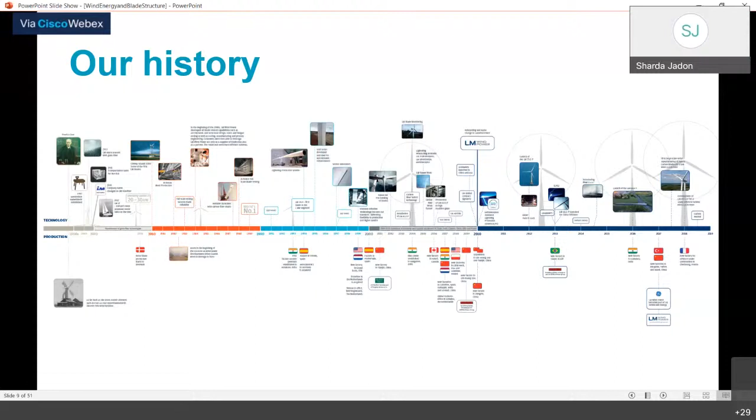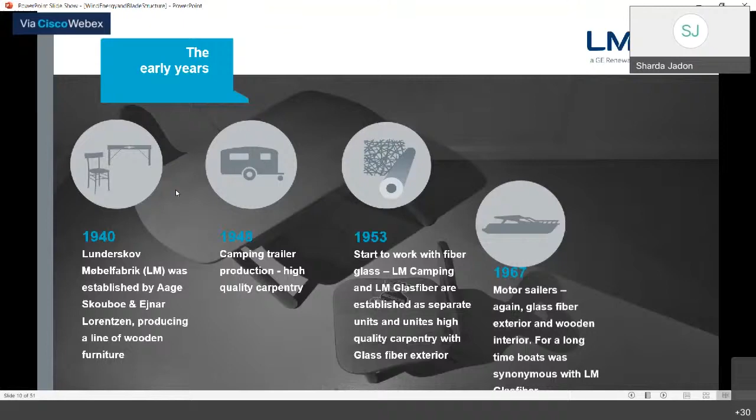Just a quick summary of how this started from furniture, wooden furniture, and they advanced in technologies, and now we are one of the best suppliers for wind. So this is about the business, this is about my organization. Now coming to what we are here to discuss.

So first of all, what is renewable energy actually? Everywhere we are seeing green energy, renewable energy. What exactly is renewable energy? But before that, another general question: where does this energy come from?

If I say energy comes from the sun, any kind of energy, you either have a light source or a heat source or both. As you know, light helps us get food for plants and then animals too. With heat and pressure, all those decomposed things convert into fossil fuels, which further gave us coal, oil, and natural gas.

There is another way to extract sun energy, which is what the sun is already giving us: wind and solar. As we know, solar is being used like anything nowadays, and wind is also accelerating. So coal, oil, and natural gas we call non-renewable, whereas solar, wind, and hydro are renewable because they will keep going. Non-renewable may get extinct after some time, but solar, wind, and hydro will keep going on. So we should think about something that will keep going and fulfill our energy requirements.

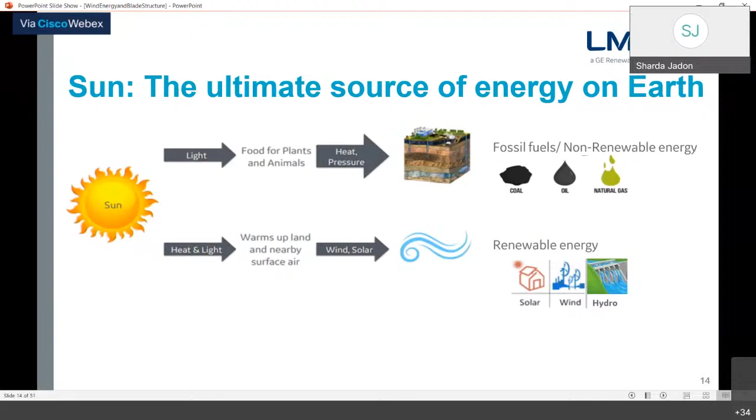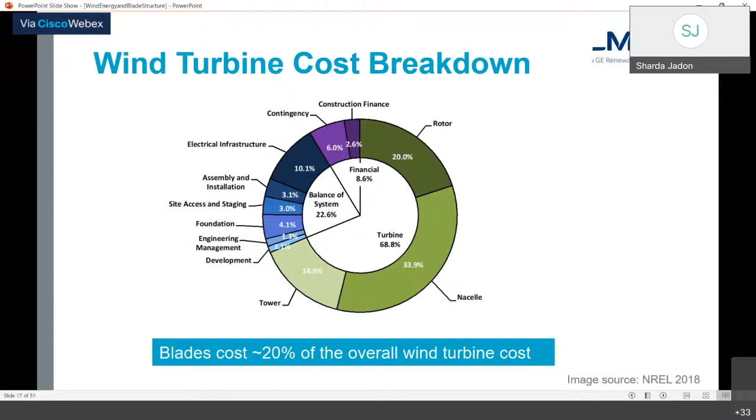It then increased in 2002, 2004, and 2012. And now in 2019 we have the Haliade-X, which is 12 megawatts. The rotor dimension is 220 meters, and the blade size is 107 meters.

Isn't it huge? I'll show you what this size compares to. You might have seen the Eiffel Tower — its dimension is around 324 meters. And the one we're discussing, Haliade-X 12 megawatt, is 260 meters. That's such a huge structure.

And how much carbon emission are we saving from this? It's around 52,000 metric tons of CO2, equivalent to the emissions generated by 11,000 vehicles in one year. That's something beautiful, because we are moving towards a better and greener world.

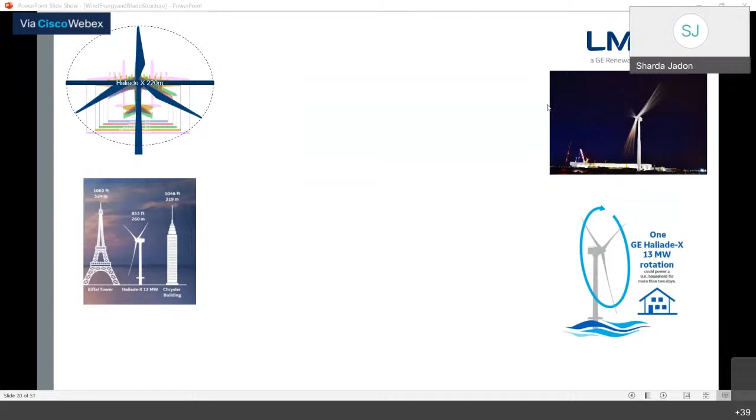Yes ma'am, thank you. So here, just to tell you about the blade design, what we consider in the blade design.

So the blade design is not solely aerodynamics, it is structural plus aerodynamics, a combination of both. Then it is also about noise and tip losses. You might have heard that people, not in India but in European countries, keep complaining that wind turbines are creating a headache for them, that it is noisy and all those things.

Yes, there are many advantages of wind turbines and there are a few disadvantages too, so we have to be very mindful when installing them. The best part about wind turbines is that the source of energy is wind, which is absolutely free, and it is clean energy. We are not burning anything, we are not creating any CO2. And another advantage is that it lasts long, up to 20 years, which gives an added advantage.

Now coming to the structural part. Noise we can control by designing a proper tip and managing losses. Especially the starting 20% or 30% of the blade depends solely on the structural point of view, then aerodynamics comes into the picture, and especially the tip part is driven solely by the aerodynamic structure.

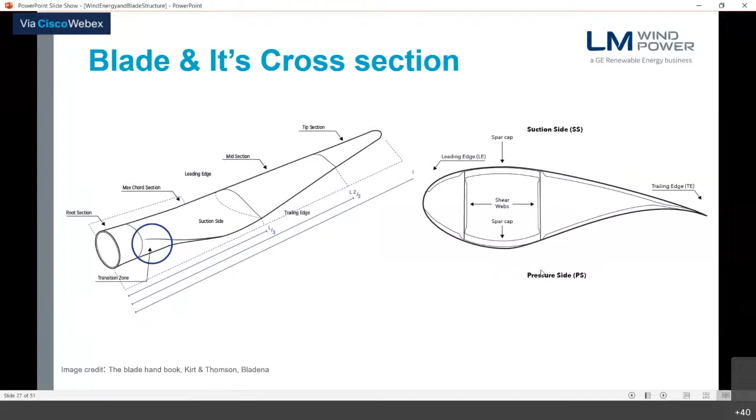Now coming to this is suction side and another is a pressure side. I'll show you more detail about it. So blades are designed, previously using metals also, but nowadays all wind turbines are using composite material. What the composite material is, I will tell you later, but first I'll tell you how the sections are there.

So we produce the blade into two major parts, which is the upwind side and downwind side, two sections, suction side or pressure side. And then we join these two using adhesive on both sides, leading side and trailing side. So you can see this leading edge and trailing edge, and here we have adhesive, adhesive here and here, and this is like the root area.

And this fiber we mix with the matrix and it becomes a composite material. The property of the composite material is way higher than steel or any other ferrous material. And the added advantage here is the weight is even 75% of the steel. So by using composite material, what we are doing is tailoring the blade depending upon the strength. Wherever we want strength, we use those kinds of fiber materials, either UD or bi-X, and this saves a lot of weight for us. As we know the blade should be lighter and lighter to generate more electricity, and this is possible only after using the composite structure.

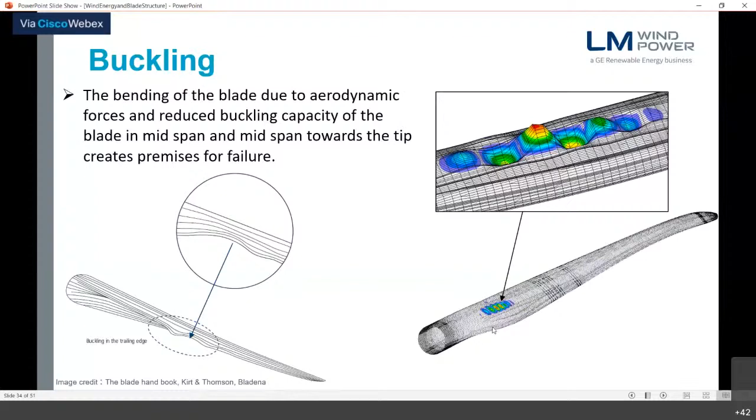One of the things is, you can see this is a leading edge. This is the blade, this is the leading edge, and this is the trailing edge part. As we know, we bond these two shells together using adhesive to join them, there may be a possibility that this adhesive can fail and this can generate a crack here.

And not only on the leading side and trailing side, but also the main laminate where we have the webs. So this can be a possible location of the crack and crack propagation.

Apart from that, there is something called buckling which can happen, because of aerodynamic loads which keep going in every direction, like compression, tension, which causes further strains that generate and deform, and it can lead to blade failure.

So apart from that, there are twists also which are coming, and which will cause shear distortion in the blade.

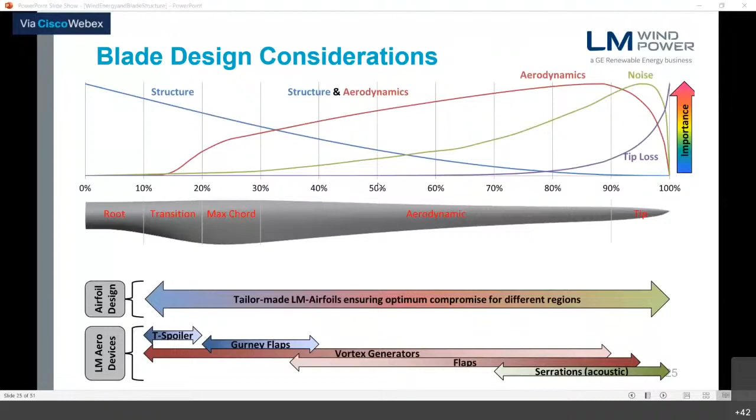So please ask questions if there's anything. And then coming to this, I have covered these failure modes here.

So the rotor size, as I mentioned, has a critical impact on annual energy production. Bigger the blades, better the annual energy production.

Again, modularity for flexibility, so we can use one turbine blade design across another turbine. And then there are add-ons or airfoil designs, more rigorous work where we add small structures which enhance the AEP, or boost the AEP through clever designs.

Then, about materials. We know traditional materials like metals won't help in this kind of design, because we want a lighter blade, a stronger blade, and something that lasts 20 years. So standard materials won't help; we want advanced materials like glass fiber. Currently in LM, we use a glass fiber polyester combination, where glass fiber is the fiber material and polyester is the matrix. Now we are coming up with more advanced things called carbon hybrids, and low styrene gel coats, which are important from the cost perspective and for lighter blades too.

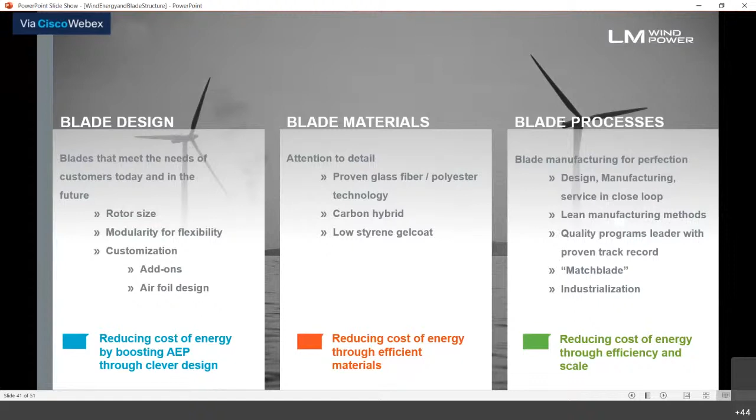We are the best in the market on this. We are quality program leaders with proven track records, which help us get it right the first time, every time. We have Matchblade and industrialization experience of almost 2.5 lakh blades till now, which is an added advantage compared to any other competitor in the market.

So, reducing cost of energy through efficiency and scaling. As I mentioned, we have very strong design drivers with us, many experienced people who know blades inside and out.

But even after that, if there is any single miss, it can be taken care of by our proven reliability, meaning our blade testing. We test our blades to the extreme to ensure reliability throughout their lifetime. We have test plants where we subject blades to fatigue and static testing, so we are ensured that our design is robust.

As we have proven records for these blades and technologies, once our blade is manufactured in the plants, it's important to ship it from one place to another, because we cannot handle the blade from any location—it should be handled only at a few fixed locations which we designed for. That's how our transportation systems come into picture.

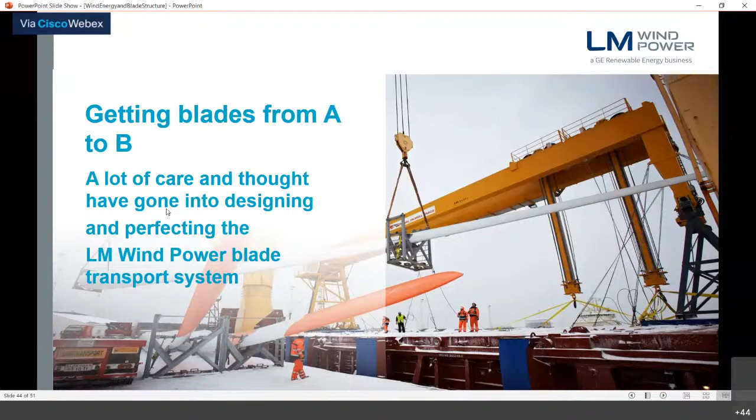It would be good if we make the session interactive, because these blades are used not only on land but also in oceans. When installing on land, different things come into the picture, and in oceans, it's a different situation. You may have a question like, what is the disadvantage of these? Because we are only seeing the advantages. Do you think it can have any disadvantage?

Like salt corrosion. In the blades and wherever we have fixed that, if there is more and more salt exposure, sodium chloride corrosion will be there. So, to prevent that, what kind of materials are coated on the blades?

So you're right. Based on the material we are using in the blades, and the gel coat and paint we are using, salt corrosion will not impact at all. So even if it is on land or water, we have special coatings which will prevent it, but especially on the blades, because we are not using any metals there. We are using composite materials.

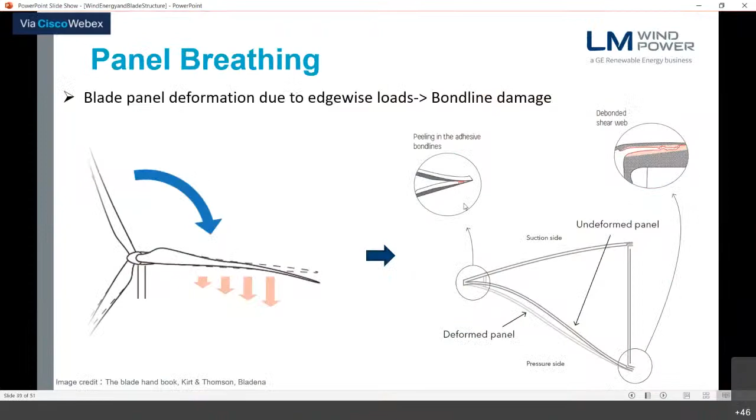So before that, could you also - Mr. Ganesh, correct? Yes ma'am. Beautiful question, like the Make in India thing, correct? I think you are thinking in that direction, if I'm not wrong. Yes ma'am, yes ma'am, perfect.

Just to show you, this is the highlight of where we are in India. So all the blade designs we make for India, we produce in India itself. We have plants in Baroda, Bangalore, and another plant in Pune - the two major production plants are in Bangalore and in Vadodara, Gujarat. These things are taken care of when we consider the Make in India initiative. So we design our blade and manufacture our blade within ourselves.

If you have the opportunity, please go and see the production plants where the blades, turbines, everything - even generators - are made in India. That's what I know - everything, towers, installations. Not only this, but even for the China market, India is producing blades. Even for the France market, India is producing blades.

Then again, transportation cost and other things come into the picture, which is why we have many locations based on cost and other factors. India has an advantage because our labor is not that costly, and production cost is also comparatively very low compared to other countries. That's the advantage India has, and not only one company, but many want to produce blades in India because of the low cost.

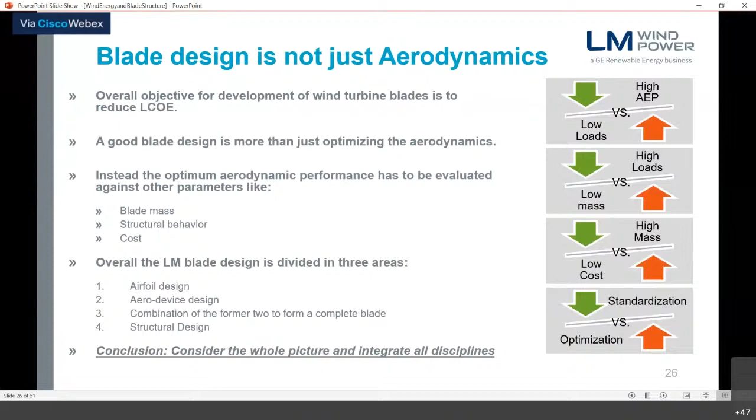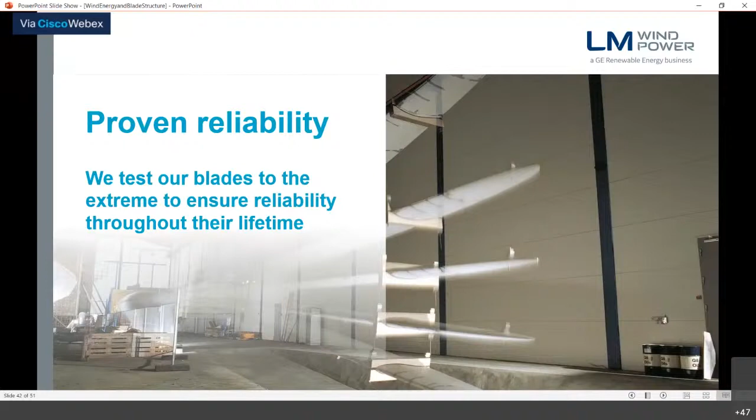As we are very much robust about our design, considering all the failure modes, which will give a life of 20 years, that is a win-win situation for us, for the wind, and for Mother Earth too.

Climate change mitigation - every year there's an increment in temperature of 1.5 to 2 degrees Celsius, this rise is there. If we can do something to control or suppress this, or mitigate carbon emissions, we are returning something to Mother Earth, by reducing carbon emissions to stay within the universally agreed 1.5 to 2 degrees Celsius.

We are contributing to energy security. We know fossil fuel will not last long. Fossil fuel is controlled by particular countries that have power, petrol, and so the market cost is driven by them. What if those end? What if supply and demand don't match, then there's fluctuation in prices. What if we exhaust all the fossil fuels? We should think about other alternatives, other energy modes that give us sustainable energy for long life.

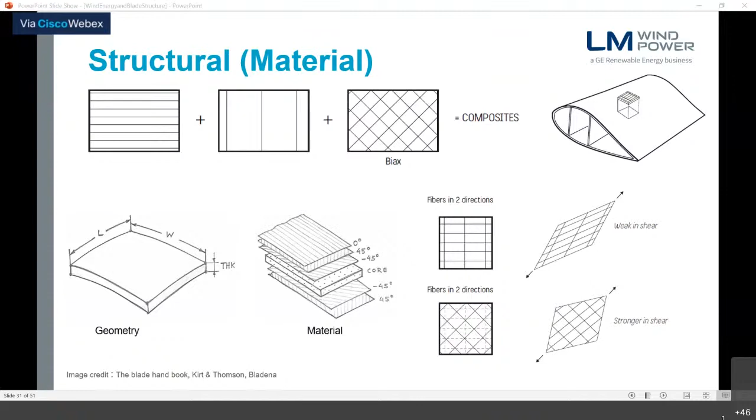You can see exactly how in your scooters, your cars, and sheds, these are the composite materials. So coming back to the topic, what is the cost of the blade? Cost of a 70-meter blade is average 50 lakh rupees per blade, and it will weigh around 16 tons.

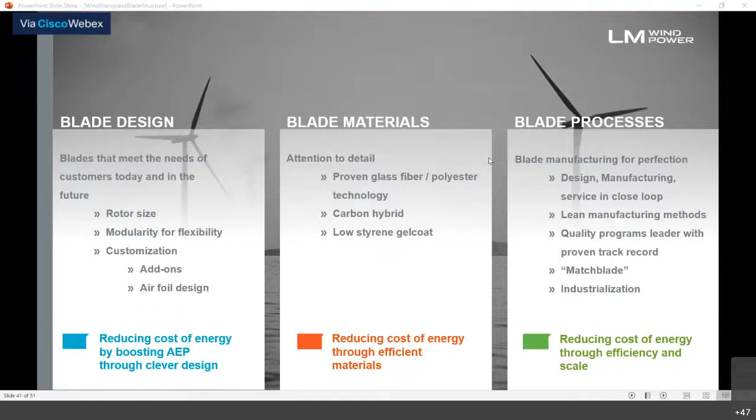Good. Something interesting? Correct? Yeah, yeah. Fine, yes. So that's just wanted to give you the feeling of the product. See, everyone, you can Google these things, but when you get the opportunity to interact with each other, it's a good thing where we can see something which we will not easily see on Google, and which can make the session more interactive.

So some more questions - is there any possibility of wind blades with solar panels, like hybrid structure possibilities? Yeah, people are doing that. At the bottom they have solar panels, and at the top they have this one, wind. So that's a combination. Or a question is something where we have a blade with solar panels on the blade itself? It's a very good question, and a very good approach too.

But the thing is, the main purpose of the blade is to make it lighter, and it should sustain those kinds of loads, the gust loads. The tip speed is more than the speed of a Formula One racing car. Can you imagine the speed of the tip? Not the root side, the tip side - it's around 300 kilometers per hour. So to sustain that speed and load, whatever we are fixing on it might add weight there, which will reduce your speed and add weight, defeating the purpose.

So ultimately it is all about the cost. If we are able to design something where the return is more than what we are investing, then it is a good option. Otherwise, there are many options people can try, but what is sustainable, where we can get good business also. Currently, maybe in future, if we have some standard materials where we can implement both, it would be a very good idea to use both as a single system and try something good.

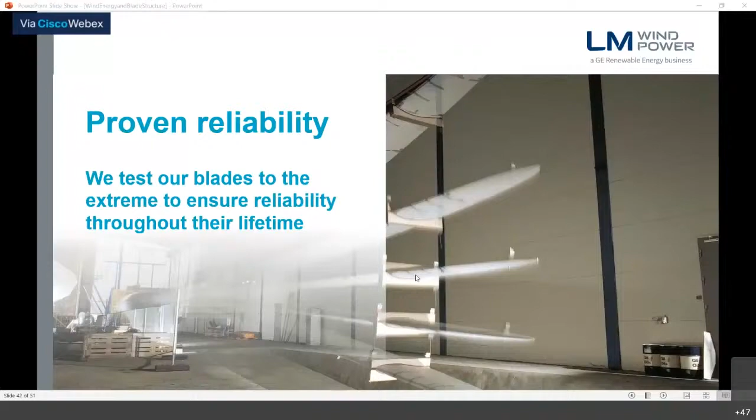Yeah, so what you can see here - I may not answer 100% of your question, but you can see these things. We have stations for every farm. A farm is where we have more than 10 wind turbines, or 20, or maybe 1,000 or 100. Everything will be connected together, and there will be a local power grid. From that local power grid, there are two solutions: either we can directly supply, or nowadays they are planning to have some cells which can store the energy, and we can utilize that stored source of energy.

Like the transformer kind of things before transmission to the grid. Yes. Like monitoring - is that possible from remote locations? No, the entire team will be there, which will be handling it, and there is automation going on there. And we have many controllers and other things which will take care of those grids.

Then coming to the connection - are carbon fibers sufficient? Like natural carbon fiber kind of thing is also added in the blade design, blade structure? Yeah, in the blade designs, yes, we have these materials. As carbon fiber comes into the picture, you might have seen the lightning effect also. So we have carbon fibers in the blade. Because these blades are something which is sharp, and it is more prone to get struck by lightning. So what exactly happens - we have a lightning protection system in the blade itself, which will help dissipate the energy to the ground instead of damaging the structure.

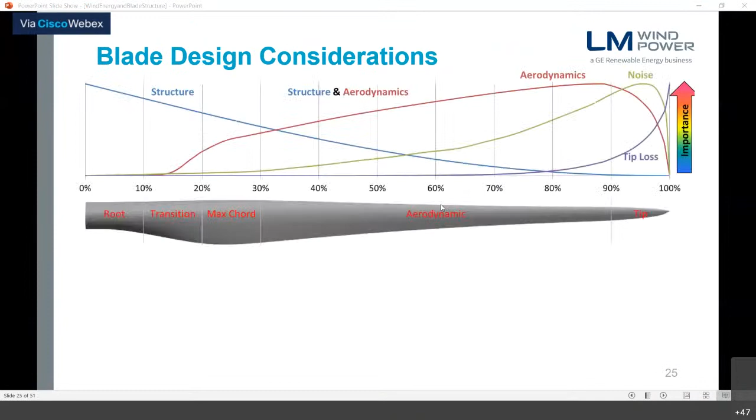Yeah, right, good curiosity, and we are doing that. So you saw the foam, the core side. Last year, I think 20,000 tons of it should be in the design. Just give me a minute, I'll show you. These core materials are made of foam, and nowadays what we are doing is recycling plastic bottles to make the foam.

This way we can get the materials as well, recycling things too. This is what the core is made up of nowadays. We call it RPET, that is recycled PET.

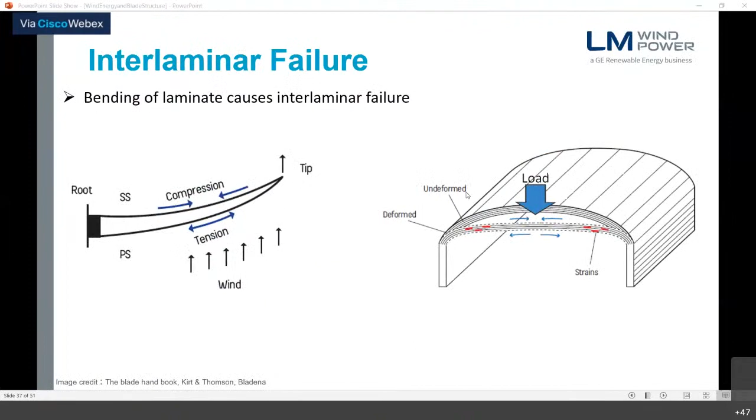If you are having carbon fiber, that will give the strength. Additional material, whatever polymers you can add, yes, we are using that for foam as of now. Whatever foam we are using, for that we are using these things. I think that answers your question.

Okay, participants, any other questions? Just a few things - is there any significance to the number of blades?

So yes, it's important, but it's also important to have the arrangement properly so that it will not distract the air from one blade to other, because there is distraction since it is ultimately the flow of air. We have to arrange those wind turbines in such a way that it should not distract, so for that we have proper study. We cannot randomly arrange those - we should see the direction of the wind and then install them. Definitely, number of blades are useful for us, and that is why we want more and more blades to have more and more energy.

Next question about the soil. Yes, soil is important. The reason is you might have seen a few days ago, the entire turbine tower came out from the center. So we have to understand the soil - actually it's a platform. Whatever platform we are having should be properly constructed so that it will not hamper the strength, because ultimately the strength is at the root side. So if your tower root is strong enough, then it's not a problem.

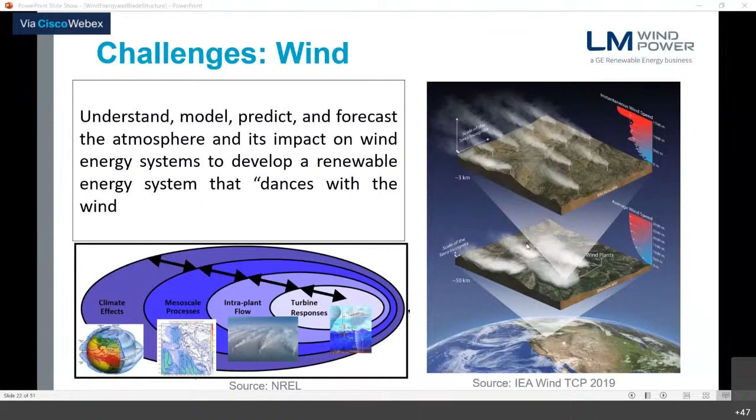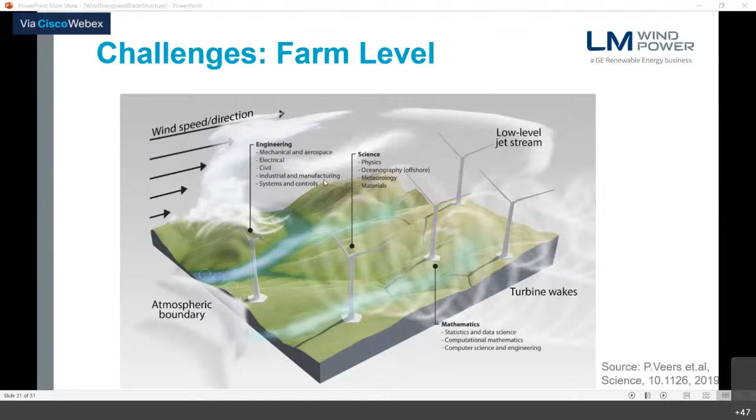Coming back to the question of Mr. Satyanarayan, the potential zones - again we have to understand, we have to go through everything. We have to understand what is the low-level jet stream, what is the oceanography, meteorology there, what is the availability of transportation, because if we want to ship bigger wind turbines and bigger wind blades, we should have proper routes where we can transport our blades. So wind speed is major important, then terrain is also important, then how the scenario is in that zone throughout the entire year. These are the few common factors important to understand the potential locations for wind farms.

Coming to the solar cells, we can identify this particular location as a hotspot zone - how you are measuring the zones, how you are identifying the zones where you are going to install, and all.

Is there a similar platform? We have a similar study about the wind, where we have to install the farms based on wind energy, based on the climatic condition, based on the average and instantaneous winds.

Any other questions? In the same related area, Satyanarayan has published a paper on how to identify the zones. This is Satyanarayan - go ahead, sir. I identified wind energy potential zones over India and the ocean, very suitable places.

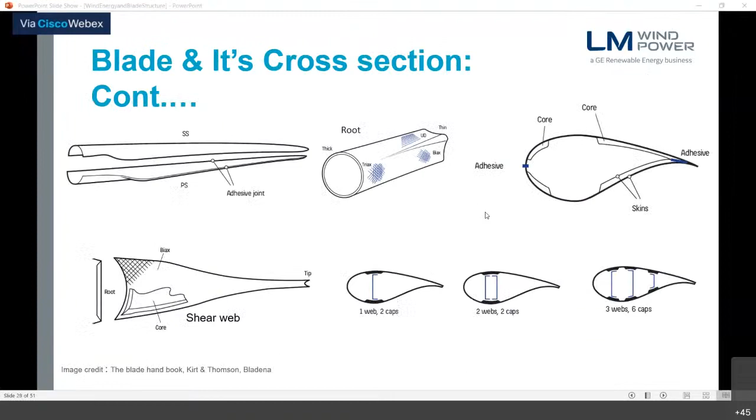Coming to the design of solar panels, we have some tracking mechanisms - from morning to evening we are tracking. The same way, in wind we have three months in one direction and another three months in another direction. Is it fixed, or do you have data on how it is to be rotated?

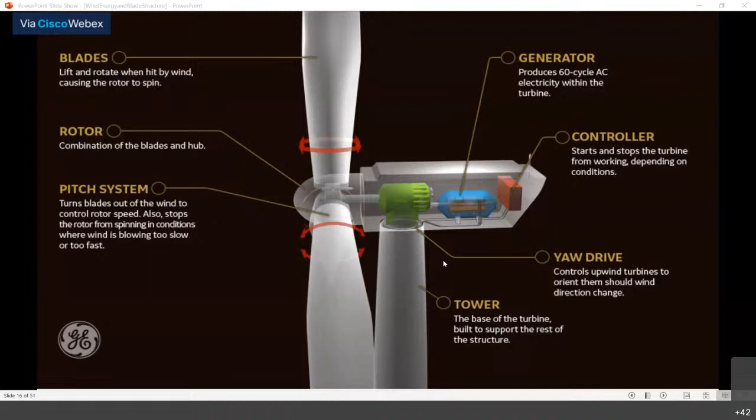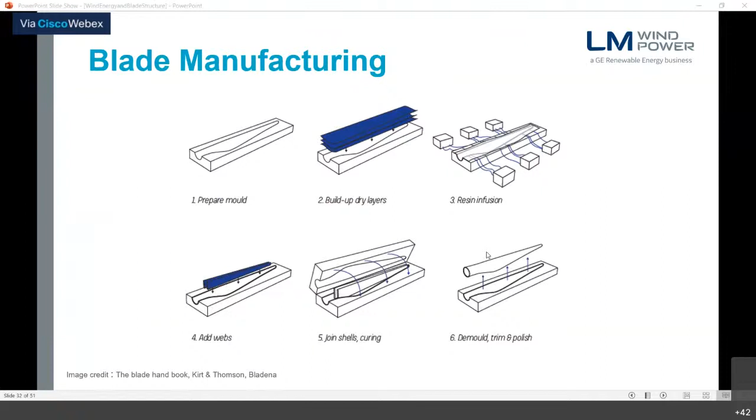Thank you, ma'am. I think I have one question, ma'am - after completion of the manufactured blades, once the total part is done...

Is any kind of special mechanical test taking place before we install the blades? Yes, we have.

The most important thing here is the weight of the blade once it's produced. Because we are not using standard materials like steel where mass is consistent - here we are using carbon and fiber materials, layups, and matrix materials with resin infusion - the weight may be somewhere higher, somewhere lower. Whatever we are designing, that weight should be in a certain range. We cannot say it will exactly be 16 tons - it can be 16 tons plus 100 kg, or it can be less than 15 or 20 kgs.

Okay, so once that is done, then we evaluate first based on weight, because the balancing of all three blades is important. If any one of the single blade is higher or lower, it will cause a problem in the balancing. And if balance is not proper, it will impact other structural parts like gears and other things. So that is one of the important tests of the blade mass.

Then we have a visual inspection. Then we have ultraviolet rays also, UV rays, where we check that all the bond lines are proper or not. Is there any dry fiber? Dry fibers is where, during infusion, there's a possibility that the liquid material does not reach the fiber, so we don't have that fiber matrix there, and it will weaken the structure. Only fiber is there, so we call it fiber rich. So then we have to inspect that and repair that section. We cut it, maintain it, repair it, and infuse the matrix material into it.

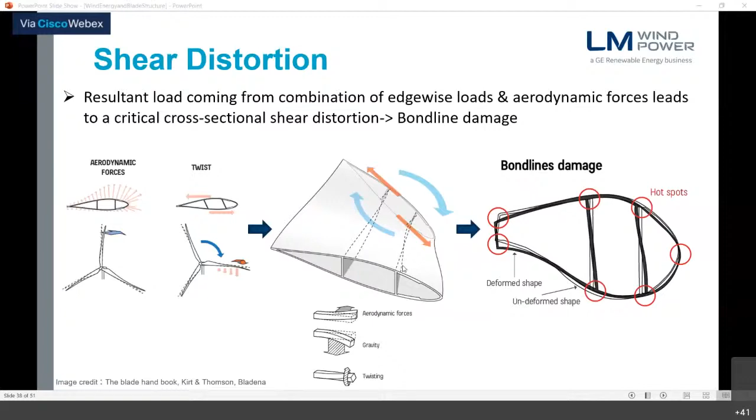Thank you very much, ma'am. Yeah, thank you. Yes, ma'am, okay. So there are many things which are very deep, and it's very good that you people are asking questions, because that will give you better understanding of other things.

So again, coming back to the safety, health, and environment concerns, everyone knows that whatever we are doing till now is not the best option. There are many better options. And after these blades, because we have a life of 20 years, there are more sustainable ways to handle these blades after the lifetime also. So people can go and check what happens after the blade is over. It should not be a scenario like how we are having plastics floating in our ocean. It should not be a scenario with these blades also. We need to think about that part too.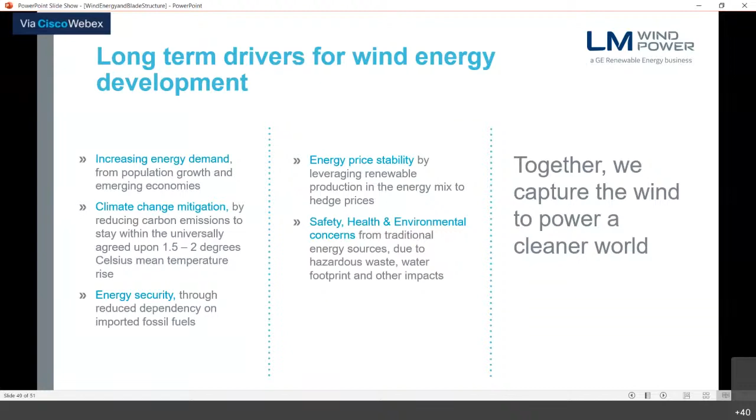And it is not only the production company which is responsible for a cleaner world, it is all of us. It is a single move, the selection of things - either we go to market with a poly bag or a cotton bag, the material we select when buying our clothes. So ultimately what I'm seeing is we have to be mindful in our selections. It is because we all have a strong commitment. It is not about the organizations doing this good work of supporting a greener world, it's all of us.